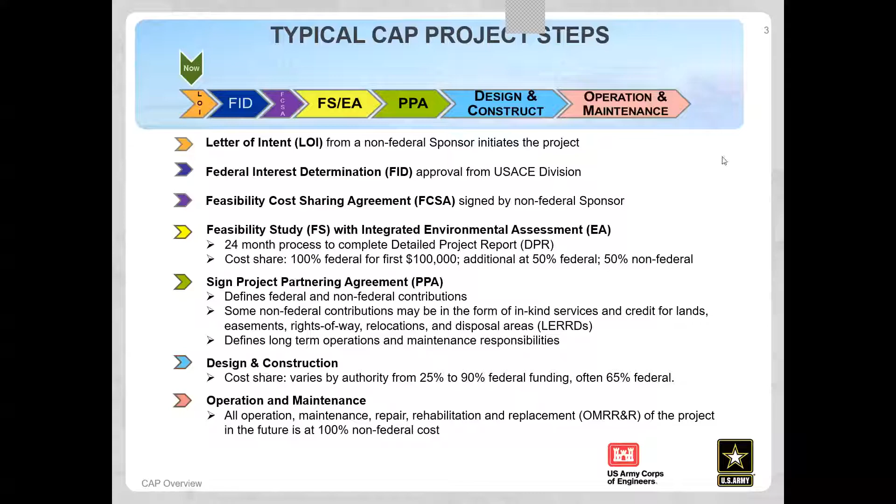The first section is Section 14, which is stream bank and shoreline protection of the 1946 Flood Control Act as amended. And an example of a project was Ottawa River in Toledo, Ohio. It was about 2,200 feet of stream bank stabilization along a road, Shoreland Avenue. The bank was being undercut by the water by the Ottawa River. It was toed, meaning given support on the bottom, and then riprapped with large stone to support the bank, and then seeded in between.

Additionally to the project, what they added were stone groins to enhance fish habitat. If you're not familiar with what groins are in these types of projects, it's sort of a little jetty, little rocks that stick out from the bank that give fish an area to rest during high water flows so they continue their spawning runs. It also, depending on the size, can give them actually a place to spawn. So in addition to the stream bank protection, there was an environmental enhancement with this project also.

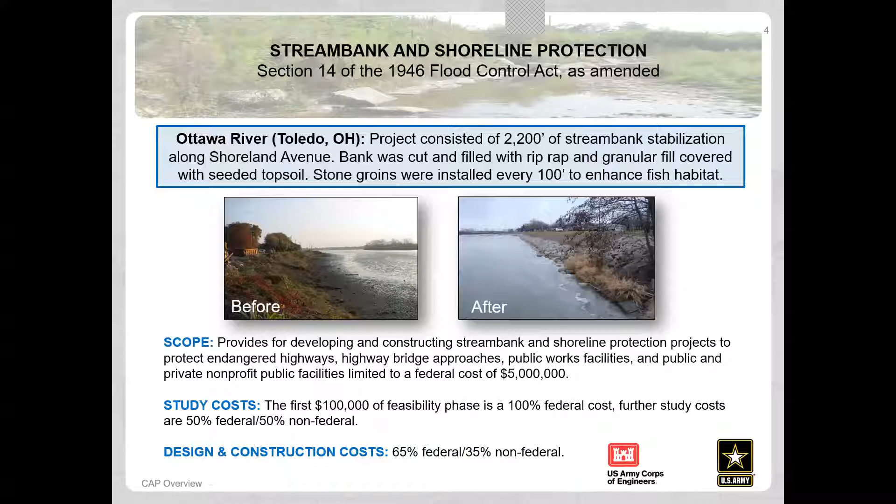So on Section 14 projects, I'm going back to what I had said previously, that the first 4, and now the first 5, are all standard as that typical CAP project slide said. The design, again, is a 65-35, 65 federal, 35 non-federal. Oops, I'm sorry. And the project at its completion, all the O&M will fall back to the non-federal sponsor. And that is typical, except for, as we'll see, I think CAP 107s with federal navigation channels.

Hurricane and storm damage reduction. With high lake levels, both in Ontario and Erie, the potential, and I'm sort of socializing this right now with heavy public infrastructure along the lake shores, to see if there are issues. One of the projects that came up was restoring about 1,300 feet of concrete seawall along LaSalle Park, directly in front of the Ward pumping station, that had deteriorated over the last 50 years.

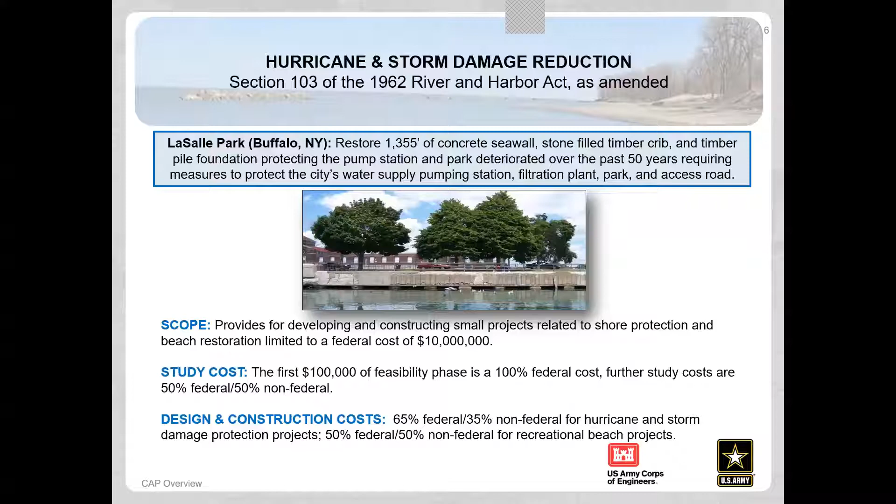So as I'll say again, the first 5 are the same as far as the project timeline or functional timeline. And as I just said, 65-35 for hurricane and storm damage projects and 50-50 for recreational beach projects. And operation and maintenance into the future is a 100% non-federal cost.

Navigation, Section 107, at least in this project, is a harbor deepening. I'm actually working on one of these projects in Oswego, New York. These can be used to deepen the harbors. A lot of the modern lake freighter fleets require a 27-foot depth because of their draft, or how deep the vessel can go fully loaded. So deepening the harbors makes them more economically viable because they can move more tonnage of commodities or material in one harbor movement, as it's called.

So these projects, again, are limited to $10 million. The study costs are, again, $100,000 and 50-50. And commercial navigation projects are a little different. The cost can range from 10 to 50%. Recreation are 50% non-federal, and the reason there's a range is because it depends on the depth that it's dredged to, and there's a formula that goes along with that I won't bore you with, but that's why there's a variation in the non-federal costs because of those different dredging depths and what Congress has authorized as the depth for a harbor.

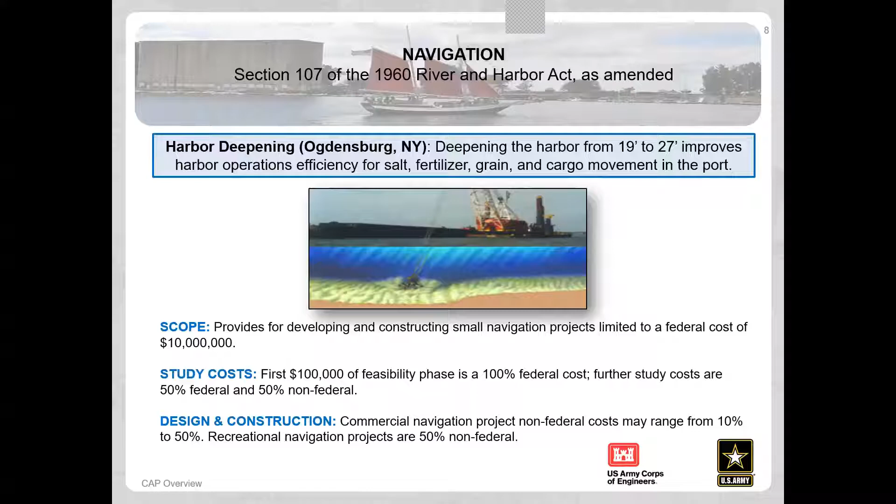Timeline, or I should say the functional, the first five are the same again. Design and construction, again, that range based on depth. And for these projects, all maintenance and dredging in the future is 100% federal cost. So this is the one that I was talking about that was different on the O&M side because of the national interest in maintaining commerce and any navigation channels that may have any military significance.

Section 111, mitigation of shoreline erosion damage caused by federal navigation projects. This is what I alluded to up front, that if a federal project was built at any time in the past and it's now causing issues, this allows the Corps to come back in and try to alleviate those issues. Half Moon Bay, California, beach fill to mitigate bluff erosion since the construction of a breakwater. Sometimes it wasn't anticipated back when these were built that these problems would occur, but this section gives the vehicle to be able to rectify those.

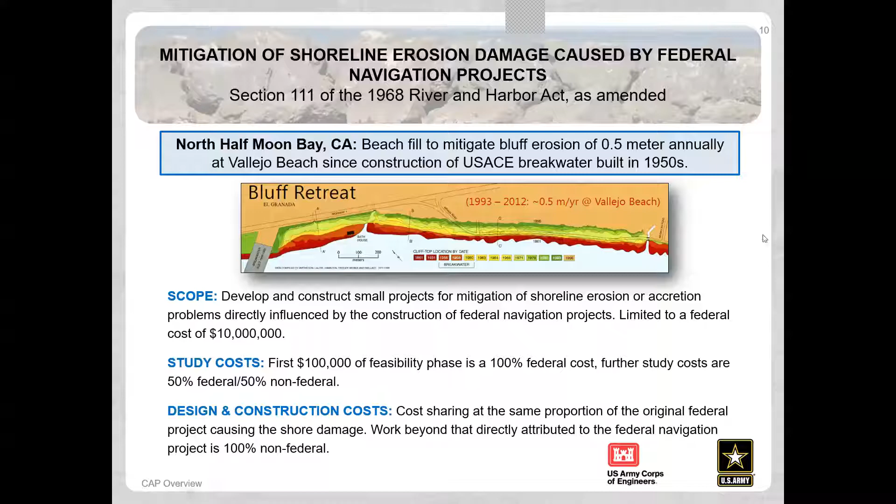Again, the first 5 are standard. The design and construction cost share is what I just said previously. And the operation and maintenance, OMRR&R, which is operation, maintenance, repair, rehabilitation, and replacement, is at 100% non-federal cost.

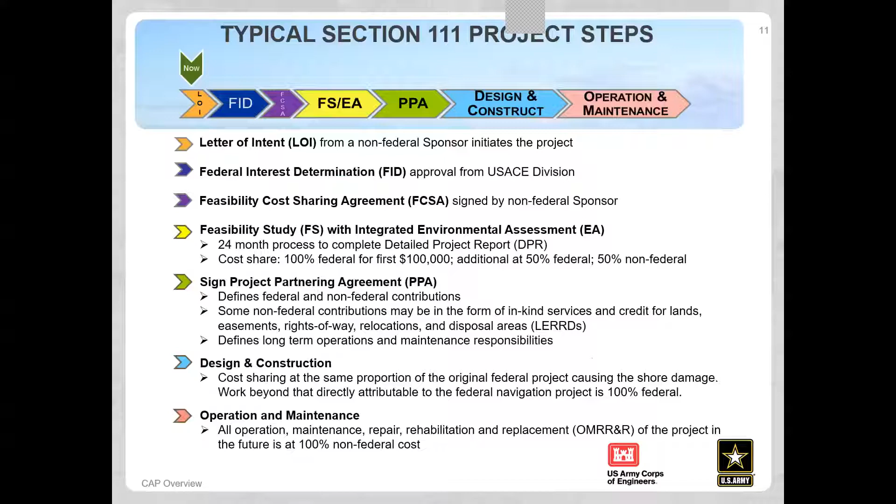Regional sediment management is Section 204 of the WRDA of 1992. It provides for the protection, restoration, and creation of aquatic and ecologically related habitats, or to reduce storm damage to property, in connection with dredging for construction or operation and maintenance of federal navigation projects. And again, it's limited to $10 million.

I've managed a couple of these projects already. Essentially, it's using dredged material to create wildlife habitat and/or protect shoreline. It usually revolves around shallowing the water with the dredged material so as to give spawning areas and more shallow areas for species to provide a food source for fisheries. Typically, and most of you probably know this already, deeper waters, because of lack of sunlight and other factors, really don't provide species richness or diversity. Using this material, usually behind some sort of structure to hold it in place, shallows the water to make a habitat zone for food source species for fisheries.

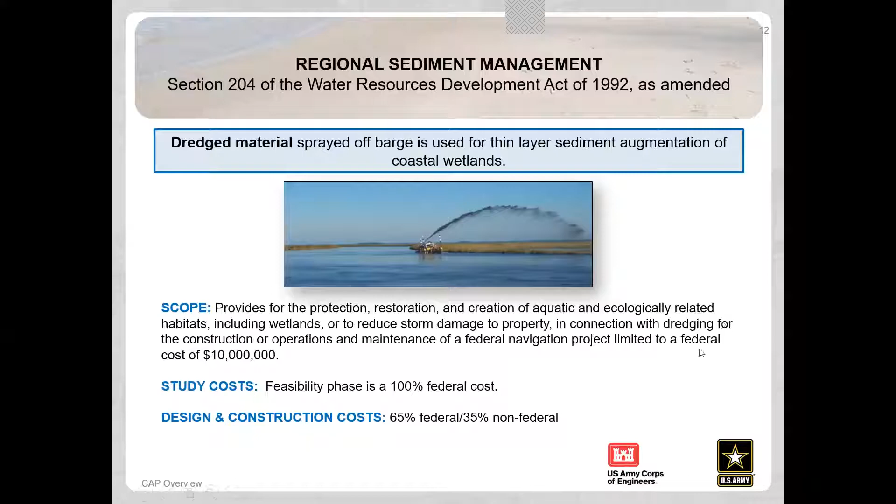Like I said, I worked on a few of these, and since we've lost about 90% of the wetlands on the Great Lakes, this is a material that can be used to shallow the waters and potentially bring back a small portion of what was lost. Typically, the federal cost limit is $10 million. The entire feasibility is 100% federal cost, as opposed to the first $100,000 being federal cost and then the rest being 50-50 with the non-federal sponsor. Design and construction goes back to the typical 65-35 federal, non-federal.

Something to keep in mind if you are along the lake shore and want to do one of these projects: you probably have to have some sort of sheltering to keep the lake waves from tearing it apart. This was already surrounded by a heavy stone dike, so it has no potential for erosion or lake waves getting in there and tearing up what was planted.

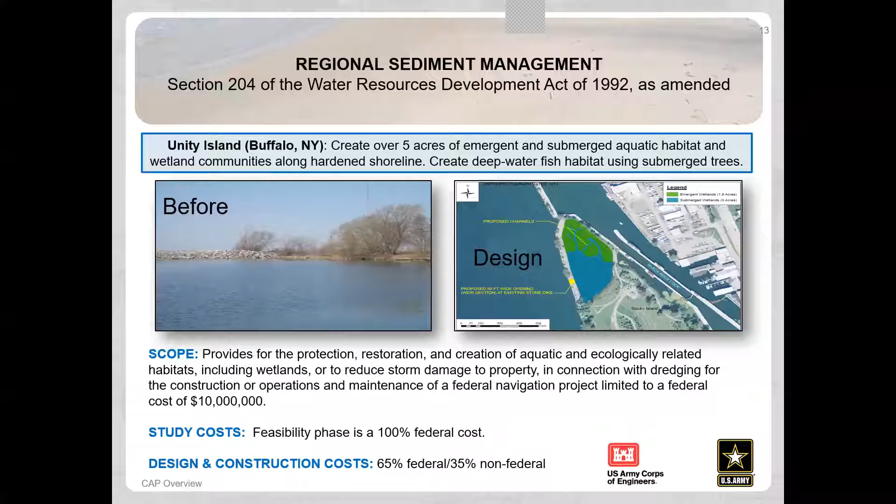I think there's 5 acres in there, and additionally there were some trees submerged in there to give some roughness and refugia for fish to shelter or hide from predators. So another locally successful Section 204 project. Again, what changes here is the 100% federal feasibility study. The design and construction is the typical 65-35, and the OMRR&R is a 100% non-federal cost for these projects.

Flood risk management, Section 205. The example here is the Cazenovia Creek ice control structure in West Seneca. Steel-jacketed concrete piers, which you can sort of see here, were anchored into the bedrock to act as an ice retention barrier to reduce downstream ice jam flooding.

Again, the scope, federal cost $10 million. Feasibility is 100% federal. Further study is 50-50 federal, non-federal, and design and construction is 65-35, with a minimum of 5% non-federal in cash. Another successful project.

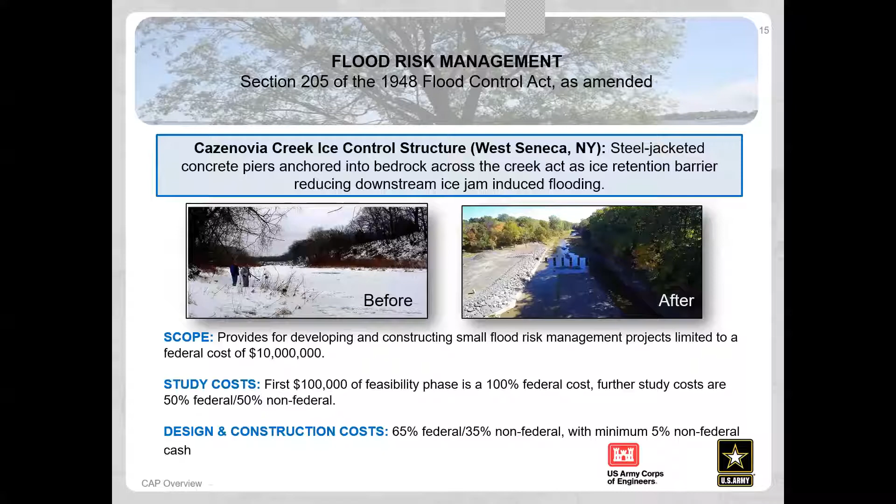One thing that was found is that it also acted as a trash rack. Trash, in this case, meaning trees that had fallen into the creek, other debris. So there was some modification to be able to reach those materials with a long reach grapple to pull them out to have them then ground up into mulch eventually. But this also is now serving a dual purpose for ice and a trash rack to keep things from flowing downstream and damming up and again causing flooding issues.

1 through 5 are the same. Design and construction here is an 18 to 30 month process, again at 65-35, and a 100% non-federal cost for OMRR&R.

Aquatic ecosystem restoration, Section 206s. The example project is the Chautauqua Creek Dam in Westfield, New York. Oh, I'm sorry. I went too far. There we go.

There were the remnants of a dam on Chautauqua Creek that was impeding fish spawning past it. In the spring they just could not get past this impediment due to the flows or the actual structure. As you see, it's sort of, I call it a kick-up dam base that's left, and there's no way a fish can get past that. And over here it's tall, and over here it's just brushed in.

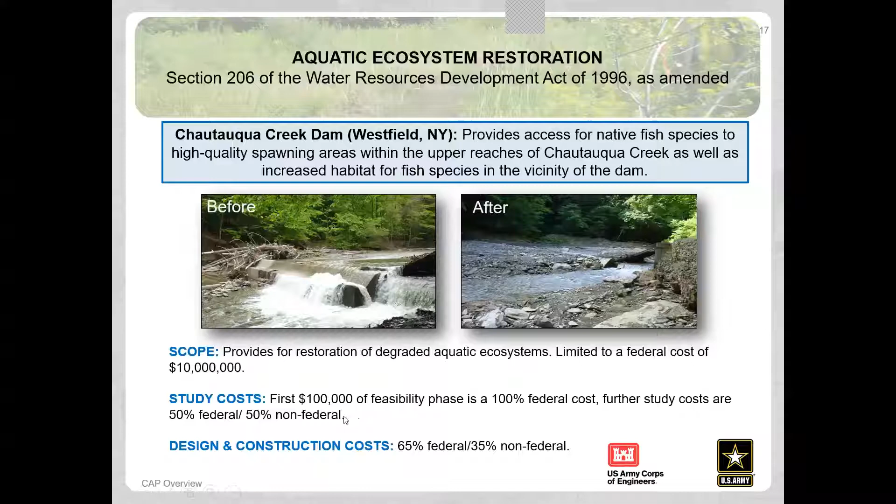So to allow more of the creek to provide spawning area in the spring, it was decided that Westfield wanted to remove this impediment. Again, the cap is $10 million. The first $100,000, the feasibility is 100% federal cost, as are 204s. But further study is 50-50, federal, non-federal, and then there's the standard 65-35.

Again, the first five are essentially the same, except for this. If you can see my cursor, it's what we just talked about. It was the matches. 65-35 in design and construction, and 100% of the operation and maintenance is non-federal cost.

Clearing and snagging, which is Section 208. So I mentioned this a little bit off the get-go. One of the projects that was, I guess, a larger project was in Arkansas, maintaining a channel condition so that the roughness of the brush would not impede flow. So as you see, the excavator with the chipper head attachment is essentially grinding down the trees into stumps so that in a flood condition, these trees wouldn't impede flow on this levee structure, which is down here with, most likely, concrete panels.

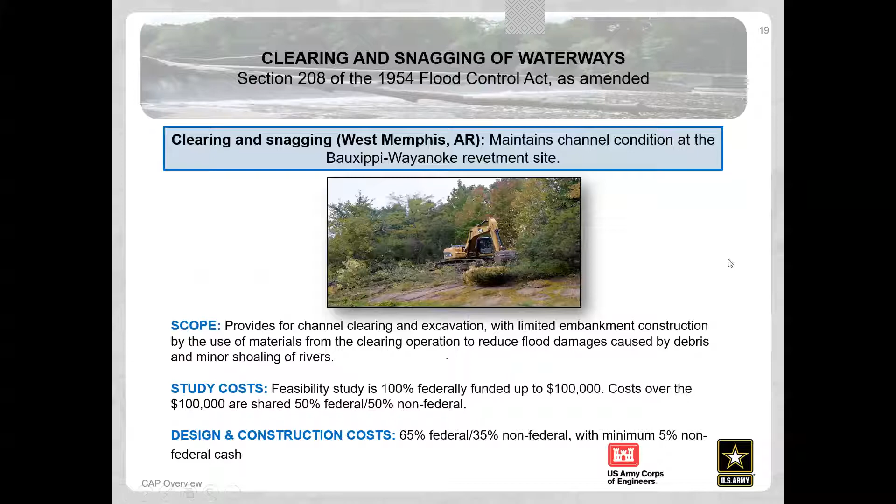Again, it's for channel clearing and excavation, limited embankment construction, probably just some small reconstruction if there was anything damaged during the project. There's reduced flood damage caused by debris or minor shoaling of rivers. Feasibility is 100%. Costs over $100,000 are 50-50, and then a 65-35. With this, there's a minimum of non-federal cash. Again, the standard, what we just discussed, 1 through 5, 65-35, and again, that 5% non-federal cash and 100% non-federal costs for OMRR&R.

Section 506s. These go along with the GLFER program. This is Frankenmuth Dam in Michigan. This was removal of the dam and construction of a rock ramp structure providing a 3% grade through the Cass River, allowing targeted species of lake sturgeon and walleye to make their way through here on spawning runs and potentially even spawning within the project. It's difficult to see, but there is a grade here. The dam was an obvious impediment to spawning, but with the grade, the flows here within the river were quick and an impediment to spawning.

So these structures, rock walls, so to speak, with a passage up through the center, allow fish to enter, and then if the flows are high, come into any one of these offshoots in between these walls and work their way up through as their strength permits. And that not only gives structure here on both sides for flood damage control and erosion, but allows the fisheries to thrive and expand.

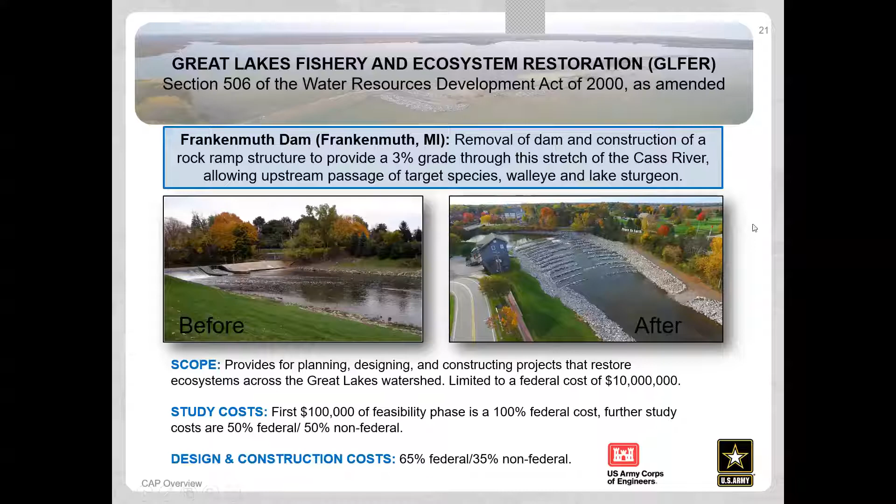Again, all the same as we just talked, and then OMR is 100%. Section 1135, modifications to projects for improvement to the environment. It's, again, taking existing projects and making them more environmentally friendly, as they may not have been designed that way in the

past. So, again, this is a weir on the 38th Street drop structure. I'm making an assumption because I didn't work on this project that it essentially slows down flows, gives places for fish to rest before they make the attempt to get through the higher flowing area of the stream, and knocks down solid impediments that would prevent fish from making it up into higher spawning areas.

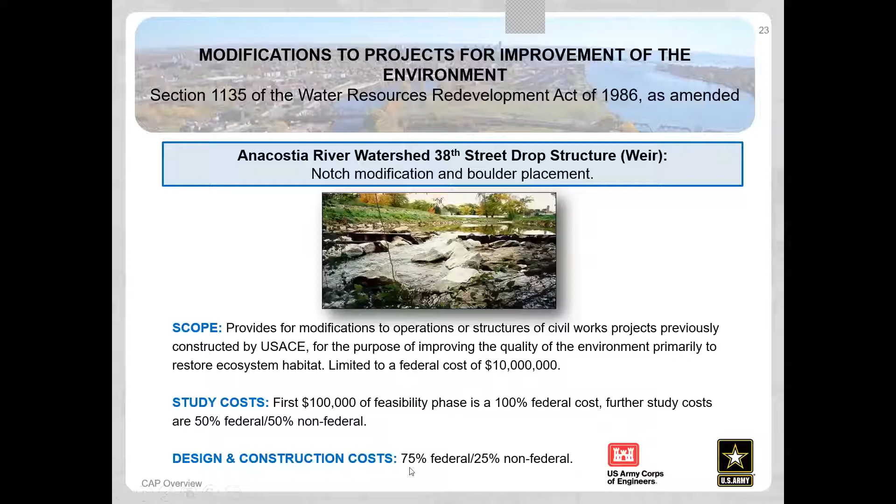$10 million scope. First 100,000, 100%, and then 50-50. And these are a different share structure of 75-25. Control of sea lamprey, very, very important. And this is the section 506 and an 1135 together.

There's currently a run of the river, but the prime contributor sea lamprey in the Great Lakes system. Project was to install a barrier to prevent upstream migration and remove 47 miles of spawning and nursery habitat for the lamprey, greatly reducing the need for lampricides. So this is actually flipping it the other way of not removing, but putting in a structure to prevent sea lamprey from getting up into spawning grounds and increasing their numbers.

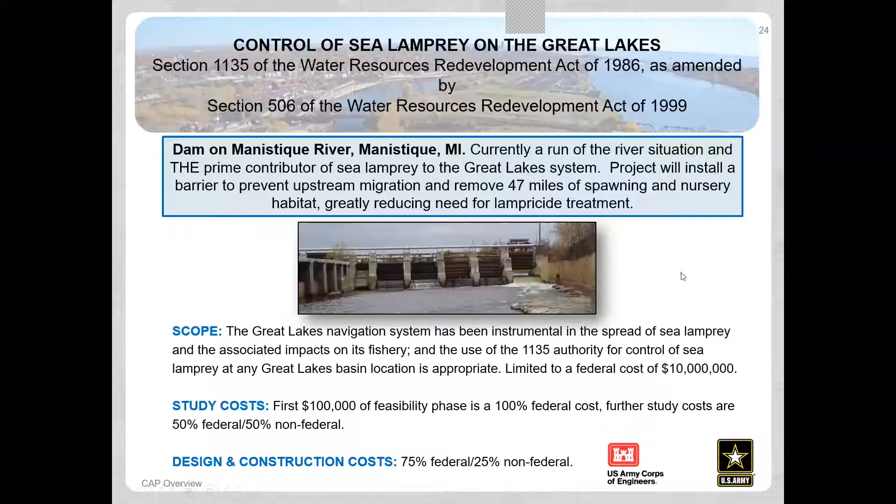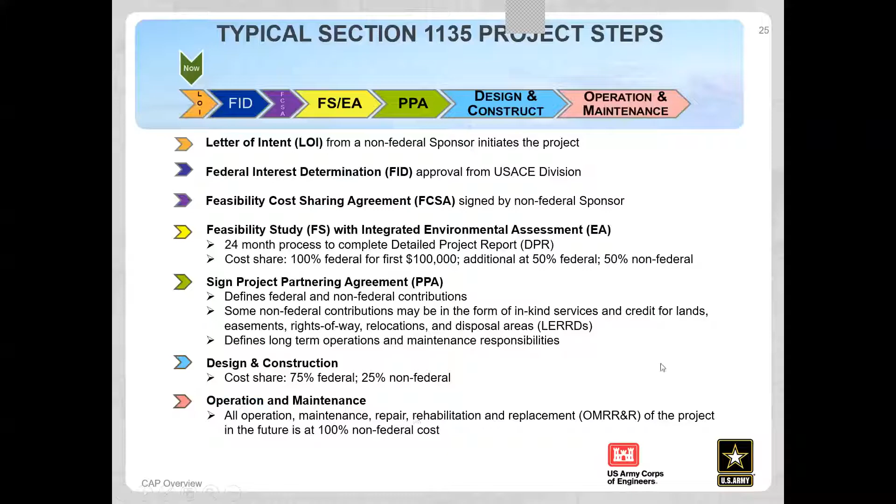Typically, these things have a gate or something in there that allows fish to pass, but lamprey to not. So that you wouldn't be impeding fish spawning, but you would be impeding lamprey spawning. The first 100,000 is 100% federal and then 50-50, and this is, again, a little bit different ratio of 75-25. And, again, as we had just said, these are all 75-25 and 100%. Sorry for the repetition, but they go back and forth.

Like I said, the CAP Authorities program provides the Corps, USACE, with the authority to solve water resource flood risk mitigation and environmental restoration problems in partnership with local sponsors without the need to obtain specific congressional authorization. CAP projects have two phases, the feasibility phase followed by the design and implementation phase. Just sort of an overall recap, no pun intended.

Development of alternative plans. This is what happens in feasibility. Different alternatives are looked at. Cost estimates are made. Environmental analysis occurs, and real estate assessments are done for LERRDs, which can be used for in-kind and federally funded up to $100,000. And the D&I phase includes final design, contract plans, all permitting, real estate acquisition, project contracting and construction, and activities related to implement the project.

Non-federal sponsor costs can include cash, lands, easements, rights-of-way, relocations, and disposal areas, or work in kind. And when a project is completed, continued operation and maintenance is typically the responsibility of the non-federal sponsor. I will say that the projects that I've worked on have been larger projects that have pushed the federal cap to its limit. These are large projects, and like I said, they take sometimes up to 2 years to do the studies because

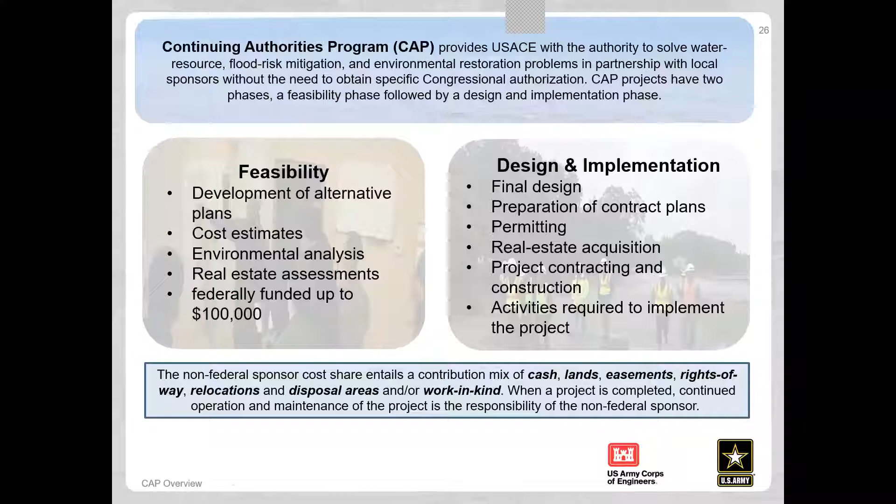So if there's an area that's an imminent danger, you'd most likely be better off tackling that yourself, at least to get it stabilized, and then potentially looking at a project with the Corps, because the projects typically take a 24-month time frame. I mean, I've sat in meetings where a municipality or an authority or a sewer district says, we need something to prevent this water main, or this infrastructure, from being destroyed, but it's not a big enough project to involve the Corps. But sometimes there.